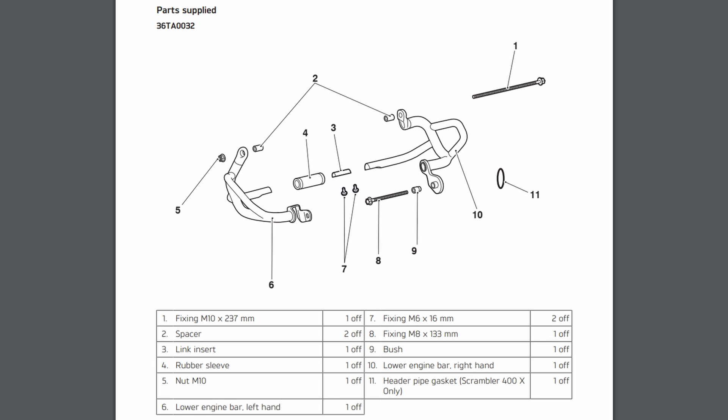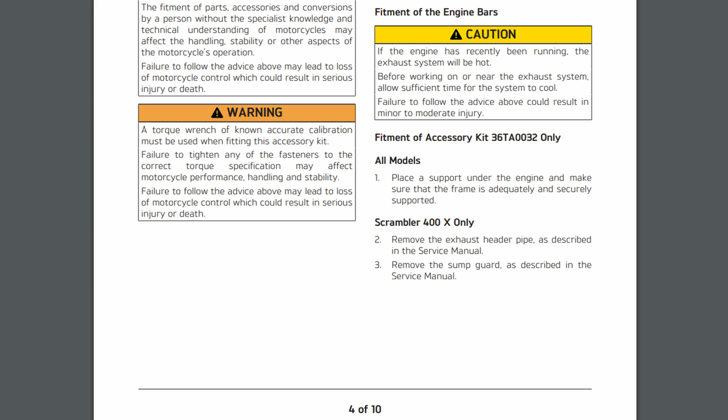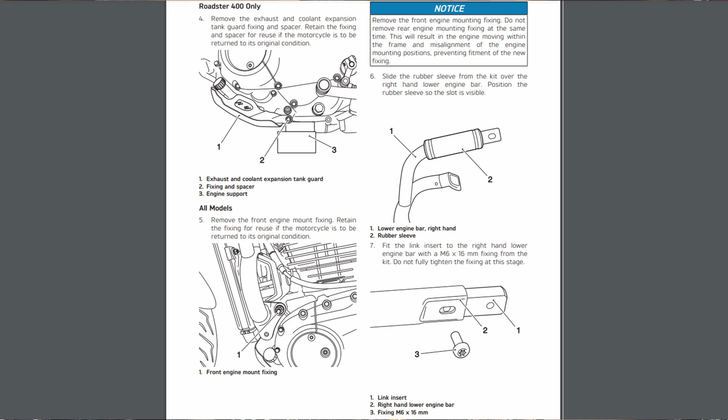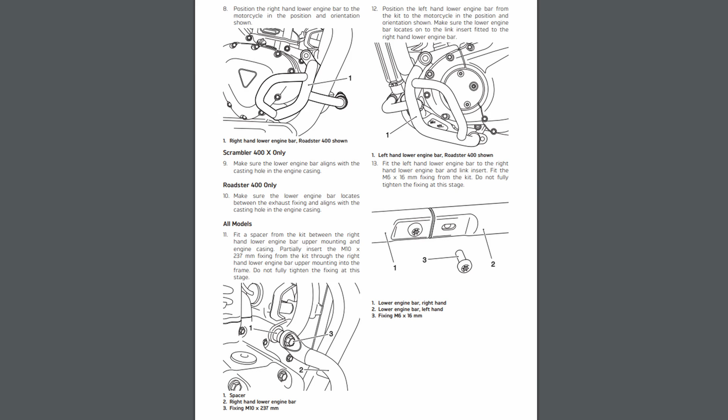The instructions actually start on page 4 with the fitment of the lower crash guards, the engine guards. Then there are specific instructions for things only for the S, some for the X. It also goes through and explains you've got spacers, you've got all kinds of stuff that you use. And then at the very end of page 7, it's fitment of accessory kit for the upper crash bars, and it shows you everything you need to do there.

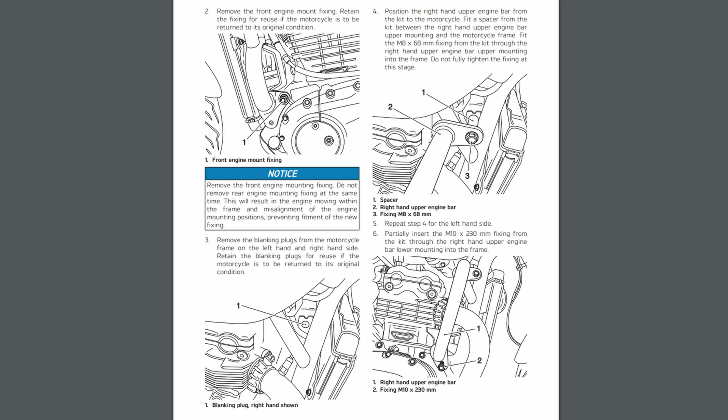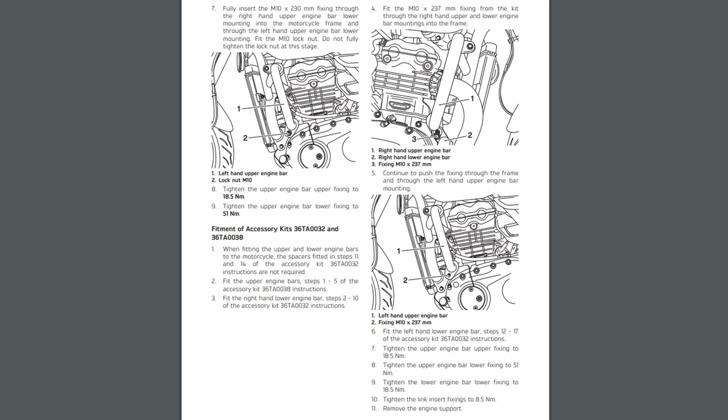But what really sticks out to me, what's most important to notice, is that on page 9 starts separate instructions for fitment of accessory kits, both upper and lower. That is where you want to start, because otherwise you will end up trying to use spacers you don't need, and it's just going to be a nightmare. So looking through that, we can see and refer back to the earlier instructions on everything that needs to happen. So that's what we're going to take care of right now.

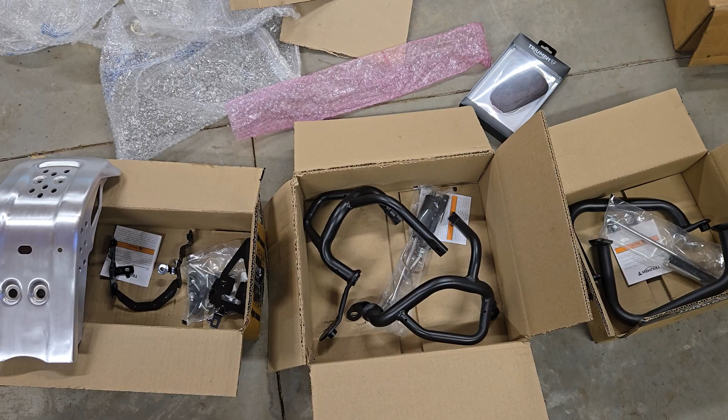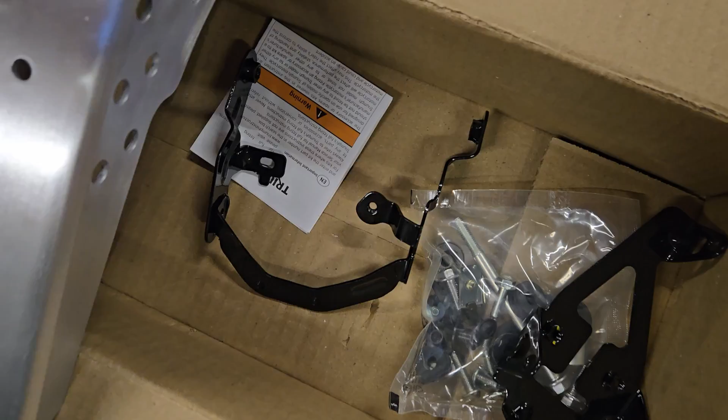We've got to remove that skid plate to get into everything anyway, and so while we have that off, we'll go ahead and install the metal one. First, the unboxing. They were all packaged very well, so that's all the material that was actually used to keep these safe in shipping. But there's the metal skid plate. There are a couple of brackets and a bag full of hardware. I'm pretty sure the brackets are the same as what's on there, and just there in case you're adding this to the Speed. There's your lower engine guards and new bolts and hardware, and your upper guards and new bolts and hardware. Well, that one's pretty straightforward. You just stick it on.

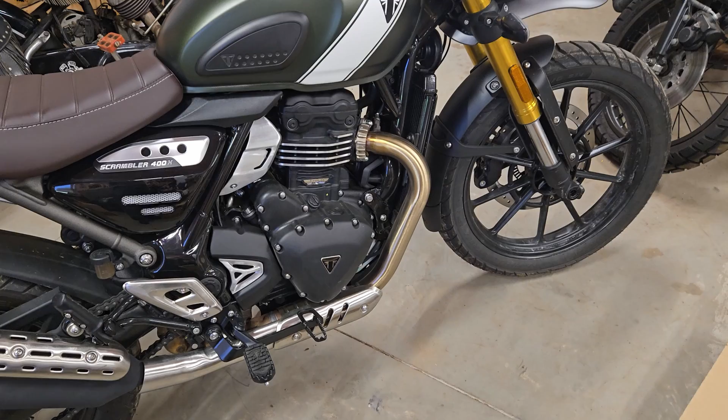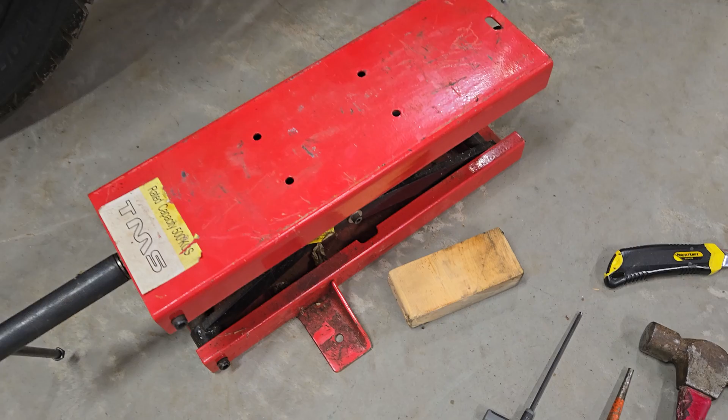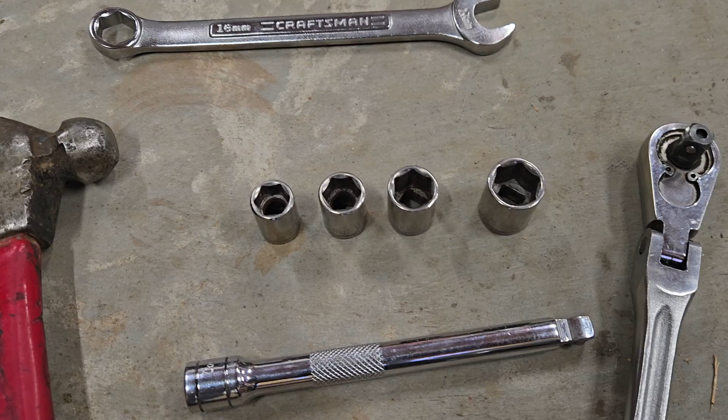But here is a fast forward to the future showing every tool I used. Well, now that they're installed, here's everything that I used. Some sort of jack to hold the engine up while you're removing bolts. Just as an engine support, I used a little piece of wood as well. 4mm Allen, some sort of punch and hammer to remove longer bolts. Alternatively, you can use one of the other bolts that goes through. Got a ratchet extension, a 12, 13, 14, and 16mm sockets, and then a 16 and 14mm combination wrench, and a knife to open up the boxes.

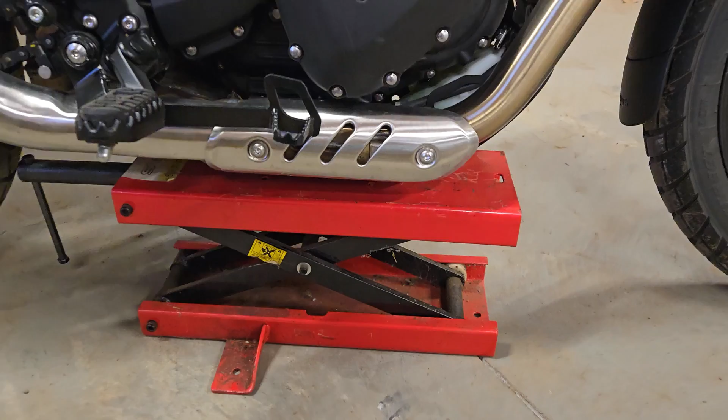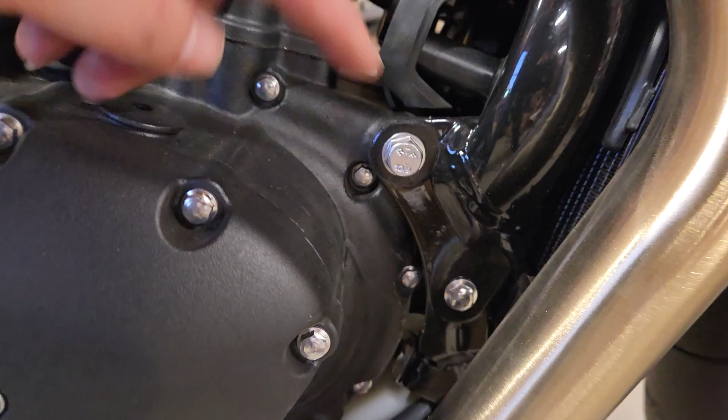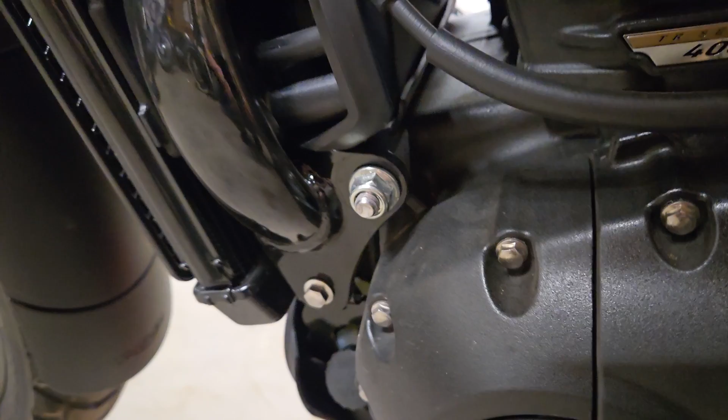The first thing we've got to do is find a way to support the lower part of the engine. You can use blocks, you can use a floor jack. I have a motorcycle specific scissor lift here, so that's what I'm using. The reason is because we have to remove this bolt right here, which goes all the way through the engine to this nut here. This side is a 16mm where the nut is, and this side is a 14mm.

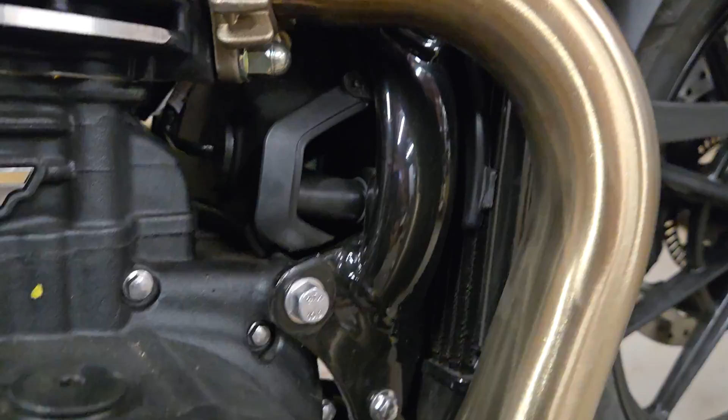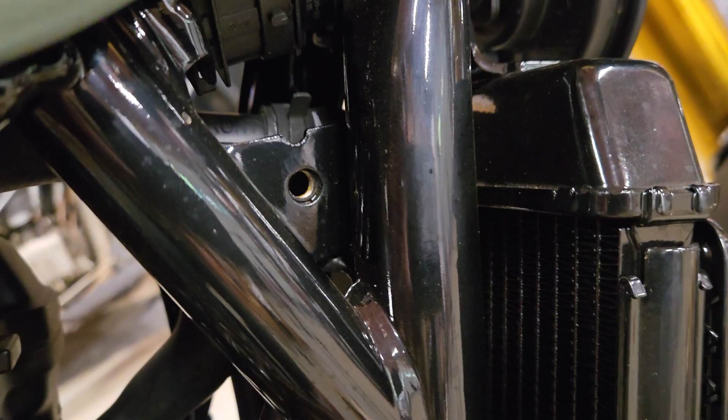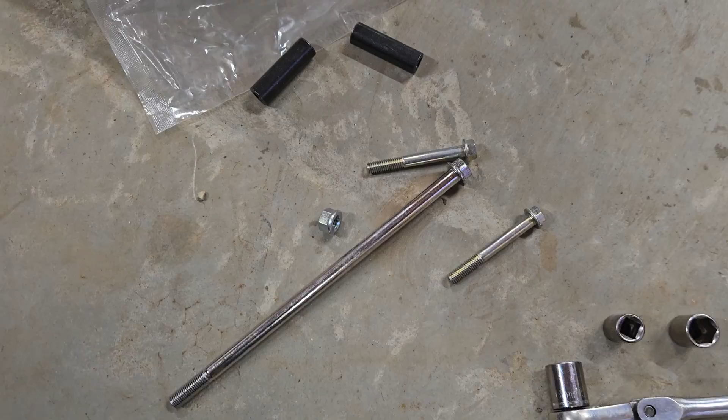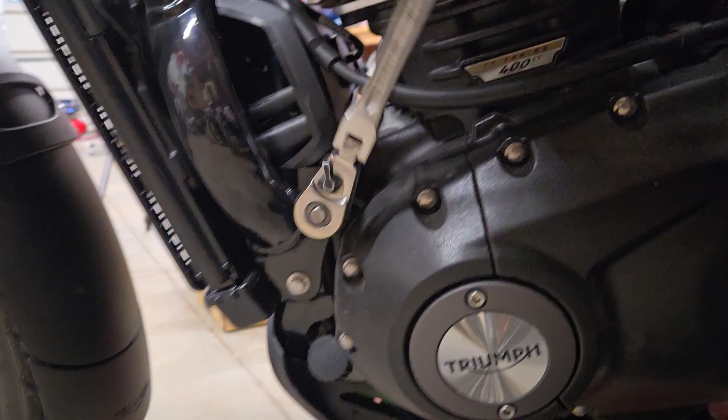And then for the upper mounts, we're going to go to these plugs right here and actually just pop them out. Inside there are threaded holes. That's where the upper mount goes. And for the upper mount, we're going to use one of these spacers on each side with one of the smaller bolts. First things first, let's go ahead and crack this nut off of here. With the nut off and the engine supported, we're going to go ahead and drive the bolt through. And we can pull it out the rest of the way from this side.

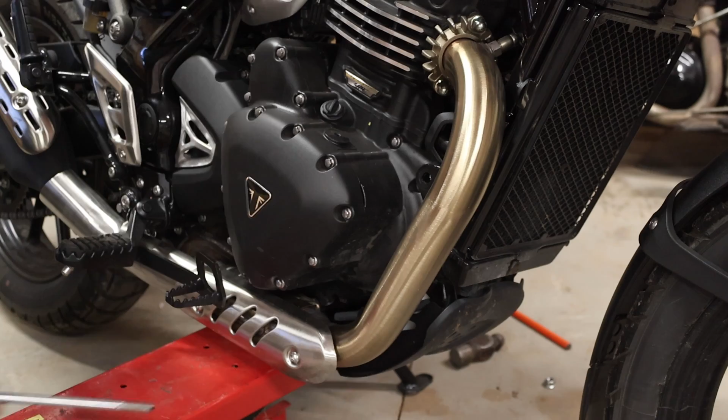Now, the easiest way to get this started is actually going to be to put the bolt through the upper guard hole. Get that started up here by hand. And you're not going to want to tighten anything all the way up front. We're going to get everything fitted before we do anything finalized. Take our longer bolt, get it slid back through. Do the same thing on the other side.

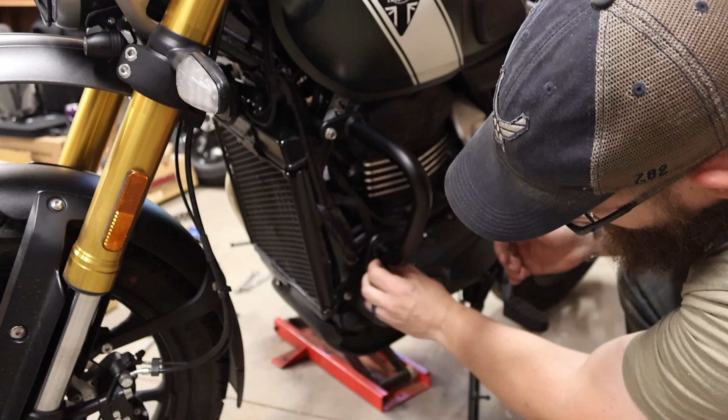Do the bolt through the upper spacer, get it started, while at the same time sliding the lower mount through our bolt, and we'll capture that with the nut. Now that is installation of the upper. Now we'll move on to the lower.

Now that the engine bolt is back in, you can remove your support underneath, and we need to remove the factory plastic skid plate, which requires a 4mm Allen, and then we're also going to loosen the exhaust. We've got to do that at the manifold, which is a 13mm, and then underneath as well. Well, 4 bolts, that's off. It's a 12mm socket to get that lower support bolt off.

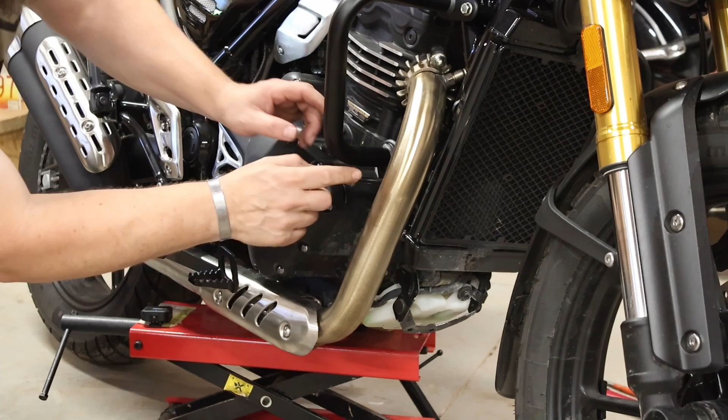It says to remove the entire exhaust header. I'm not going to do that right now. I don't think we have to. Time will tell, but I think all we need to do is have this loose enough that we can get up under there and replace that spacer. So with that bolt backed out enough, this spacer is going to drop out. Now with the stock plastic skid plate off, we do have to re-support the engine because we've got to use this engine mount bolt again to put the lower bars on.

Now the bolt that comes with the upper crash bars is long enough for the upper crash bars, but the bolt that comes with the lower crash bars is actually a little bit longer. So we'll go ahead and use the longest one. Alright, get that started. Get this pried up into place.

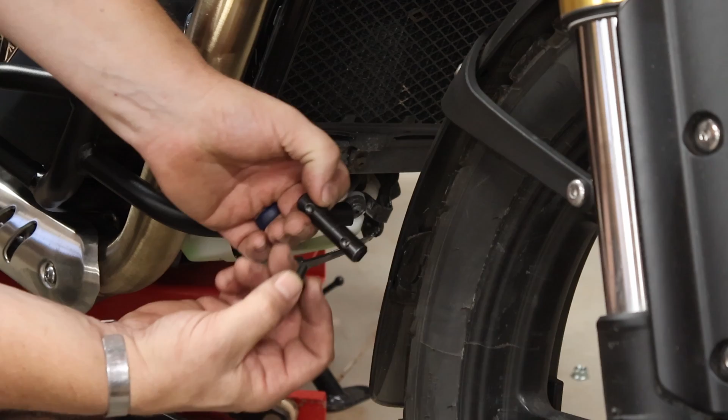Basically all I did was use a bolt, pull this exhaust away from the engine a little bit so I could slide that in there. Now on the very front of this mount, these two side pieces are going to connect. So in order to do that, we're going to slide in this little connection bar they've got, a couple of bolts. Get that started.

And then they've got a cover for it. It's a little rubber sleeve with the Triumph logo. So we'll go ahead and slide that on so that when we're done with installation, slide it back over the center. Now the left-hand side is going to be easier because we've already got this bolt through. There's nothing to clear there. We've got something to line up here. So we'll go ahead and line that up, slide that over.

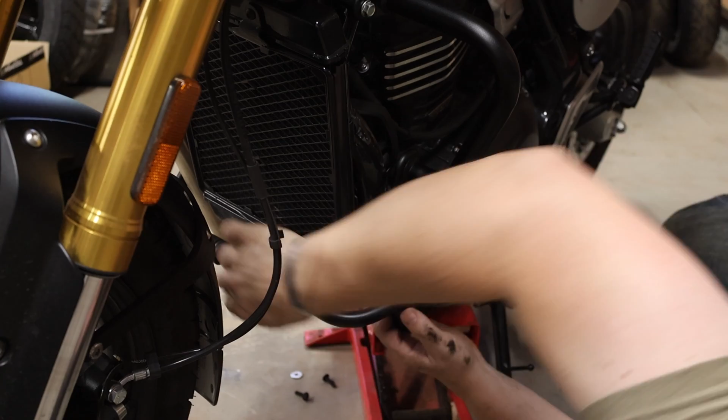First thing I'm going to do is put the front bolt on, get that started. Again, everything is loose right now. We just want to know that we are connected. We can get this nut started.

And again, now that we've added to this lower bolt, this is the stock one. There's a longer one included with the engine bar kit. So we're going to get that started through the bracket on the engine guard. Then we're going to use the smallest of the 3 black spacers, and then go back through the factory mount and into the lower exhaust bracket.

There we go. And I'm going to cheat on this one. Alright, that's tight. Well, not tight, but secure. Now that we've got all the bolts through, all the nuts on for the upper and lower crash guards, we're going to go back around, tighten everything up. The exhaust manifold, all these bolts up front, put this rubber piece over the middle, and then we should be all set. So I'm going to start from the bottom, work my way up, and make sure everything gets tightened down.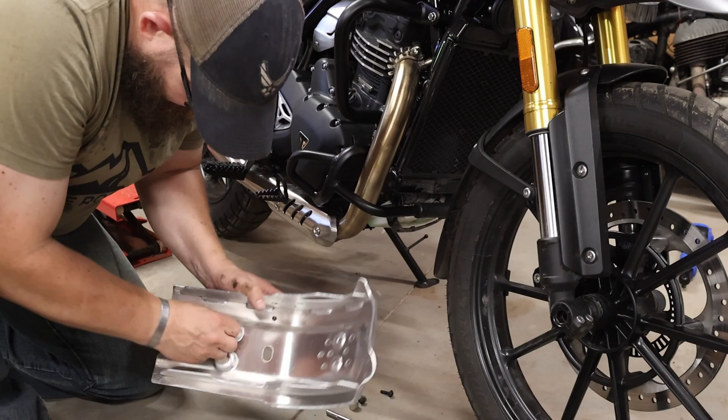When we get to the skid plate, we're going to install our rubber bushings into the big holes down here. We've got metal spacers that'll go from the top side, and then new bolts, silver, that'll match for that on the rear, and then new ones for the front as well. I usually just get them started on one side by hand, and then use something, screwdriver or something small, to push them in, and then you can play with them a little bit, get the back side through properly.

Okay. And we'll put our spacers in here. And these bolts will go through here. Small ones up front. And if you have questions, you can just refer to how the plastic one was set up. Realistically, looks like you can just reuse the plastic hardware if you want to. Get it started on the bottom, so we know we're lined up.

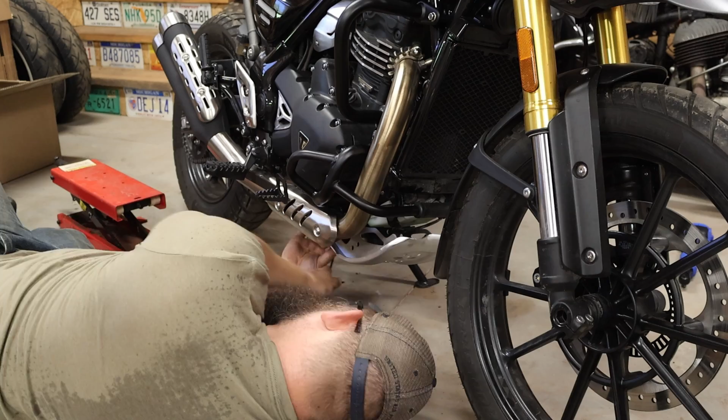With that lined up, we're going to get the metal over these rubber bumpers and the side plates. Don't worry, if you do happen to mess one up, you're actually getting more included with the kit. In front, I'm going to go ahead and tighten off one. And it's on and secure.

Installation of the tank pad is extremely easy. Simply going to pull it out of the package. Figure out where we want this to mount, roughly in about here, essentially to protect zippers and belts from coming in contact with the metal, the paint of the tank. Get a nice little easy tab to hold on to. Remove that to expose the adhesive. Get it lined up perfectly. You can measure. I like to do stuff by sight. Lay it down. Make sure that comes in contact everywhere.

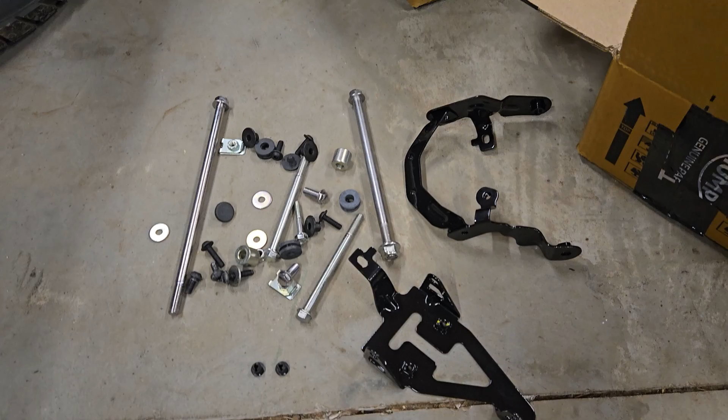And that's complete. And what's left over here is a variety of stock brackets, bolts, brackets that were included, but I didn't need to use because the bike already has them. Plugs that came out of the bike, exhaust gasket that I didn't need to replace, all kind of stuff, as well as the stock skid plate.

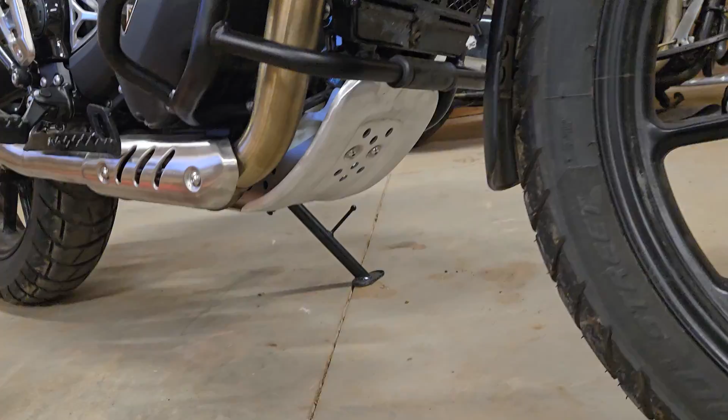And now, finished product. Upper, lower engine guards, and the aluminum skid plate. Very happy with the look, very happy with the protection. All Triumph factory parts, so everything fits exactly, works perfectly, looks amazing. And it's going to keep us from having any issues off-road. If we get tipped over somehow, protect that engine, protect the tank. Very, very happy. Hopefully this helps you guys.